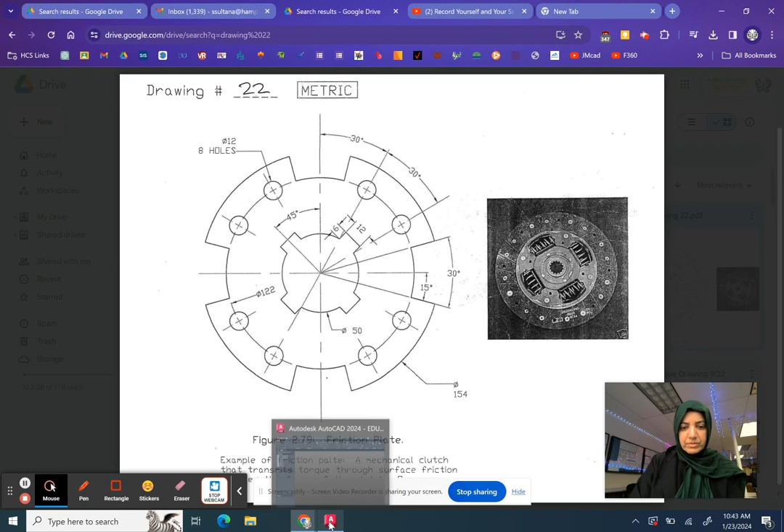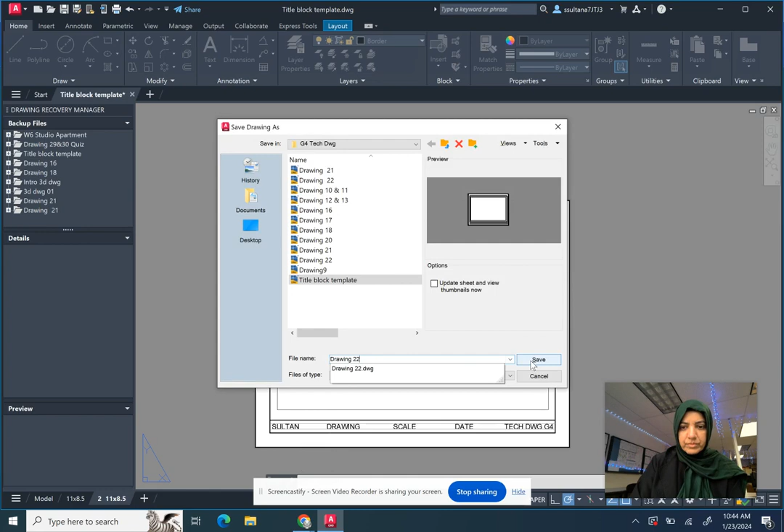So let's go to AutoCAD and open your drawing template that has layers in it. Title block layers, and then save as drawing 22. Click on model space and start drawing.

We're going to start with the center layer, using the line tool, and the start point can be in the first quadrant. Based on the size of the drawing, I'm going to decide 200 comma 200 as the starting point, then go right from there and make it 200 units long.

Now I want to have a vertical line that goes through it, starting at 300 comma 100, and then make the height 200 units for the line.

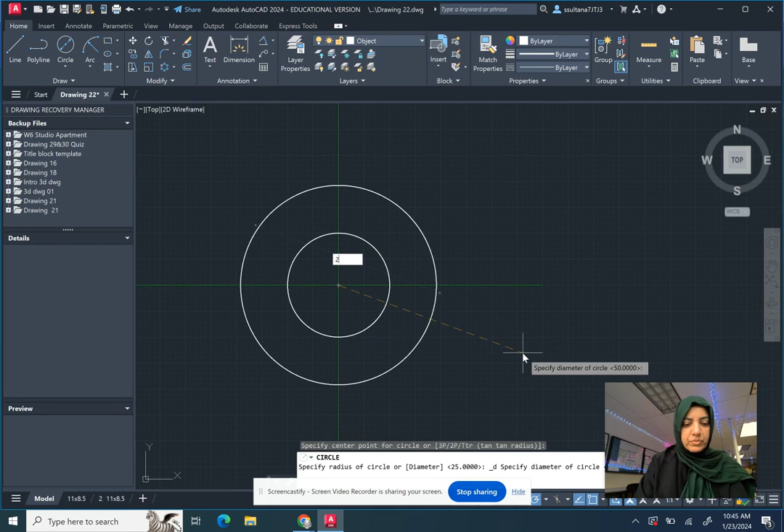Now we can go to the object layer and start our circle. The circle diameter is given, so we're going to select center diameter circle. The first one's diameter is 50. The second circle's diameter is 122, and the outermost circle's diameter is 154.

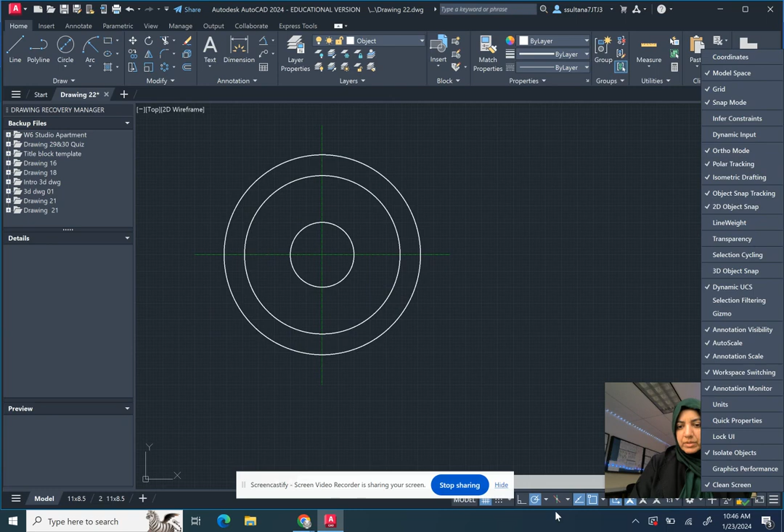Then we are going to use polar tracking, which I have on. If you don't, click on the three lines in the lower right corner and you will see polar tracking there. If I uncheck it, it disappears; I check it, and it appears again. You need to click on it when it's highlighted in blue.

That means it's activated. Click on the arrow next to it and select 15, 30, 45 angles, then click on the line and start from the center of the circle and go, and you will see it snaps on 15.

I'm going to match properties with the center layer and go back to the center layer to draw these reference lines. Click on line again, start from the center, and this time it will snap on 30 - that's where we want. Then we also want one at 60 - it snaps on 60. And then the last one at 75.

Going back to the object layer, you're going to draw straight lines overlapping on these lines here. This circle, we're going to put that in the center layer.

And then we are going to draw small circles, these small circles that have diameter 12. Those are on the intersection where the 30 and 60 degree lines are.

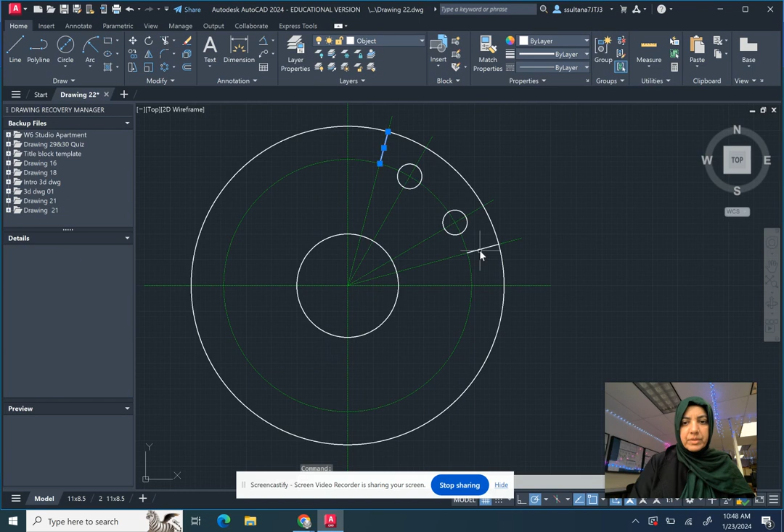Okay, now we are going to trim. Select these two short lines and trim the outer circle beyond those two lines.

And then use the polar array command to polar array these elements: two straight lines, one arc, and two circles. Right click, click in the center, and then change the items to 4. Enter.

Now we do want this arc to be on the object layer, this part of it. And we can trim that to avoid overlapping.

And then draw an arc that is start and radius. So if you click on the start, you have to start from the right side, then go to the left, and then click on the center of the circle to give that radius, which is 61, half of 122.

So you can repeat that, or you can polar array it. Let's polar array it, click the center, and then change the number to 4.

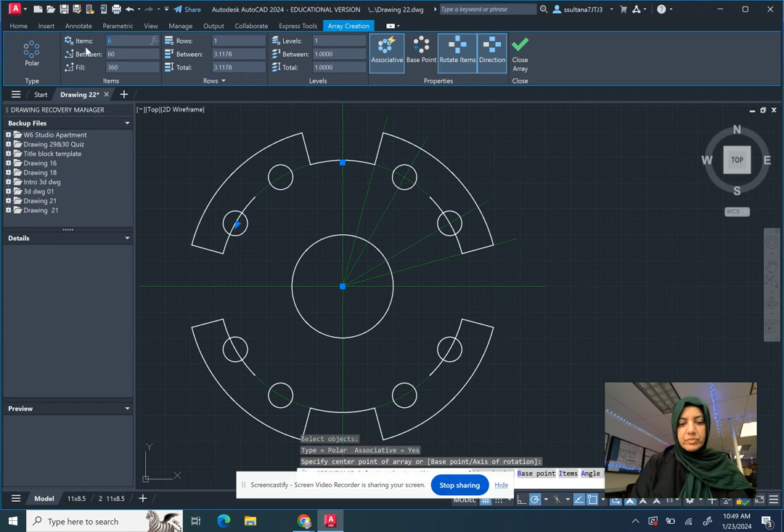The drawing is almost complete. There is a part in the center that you need to add, and that is a 6 by 12, and it's polar arrayed 4 times, landing on the 45-degree angle. So the 45-degree angle is right in the center.

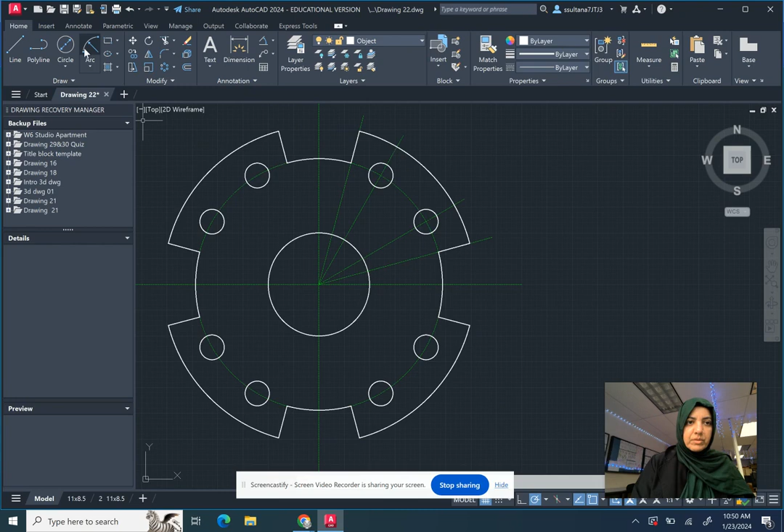So what we can do is draw a polyline, and we can draw it anywhere, making it 6 units, 12 units, and then 6.

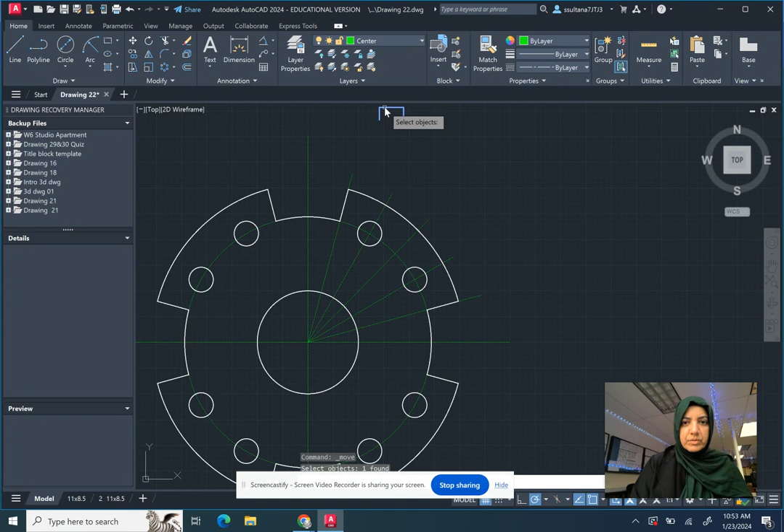And now move that. I'm going to draw a line in the center layer at a 45-degree angle. And we are going to move this, grab it by the midpoint, and place it at the line that is at the 45-degree angle. Then use the rotate command.

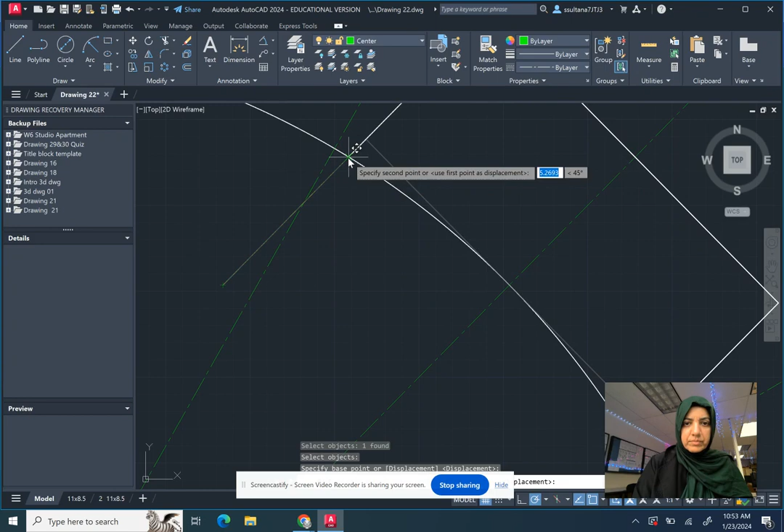Then rotate -45. Now move it: click on it, click at the endpoint, and click at the intersection. Use polar array, click on it, center of the circle, change the number of items to 4, enter.

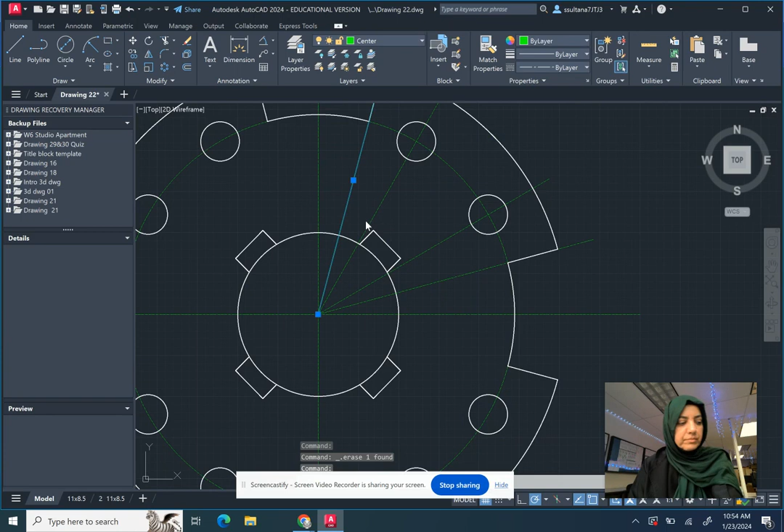At this point, we can delete the extra center lines. And then trim these pieces of circle.

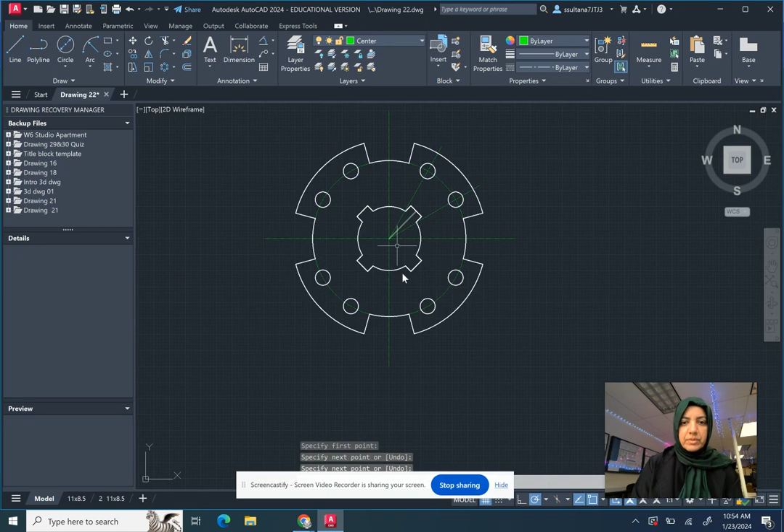There is a reference line we do need for dimension purposes, and that goes from here to the center of this, at the 45-degree angle. So the drawing is complete now.

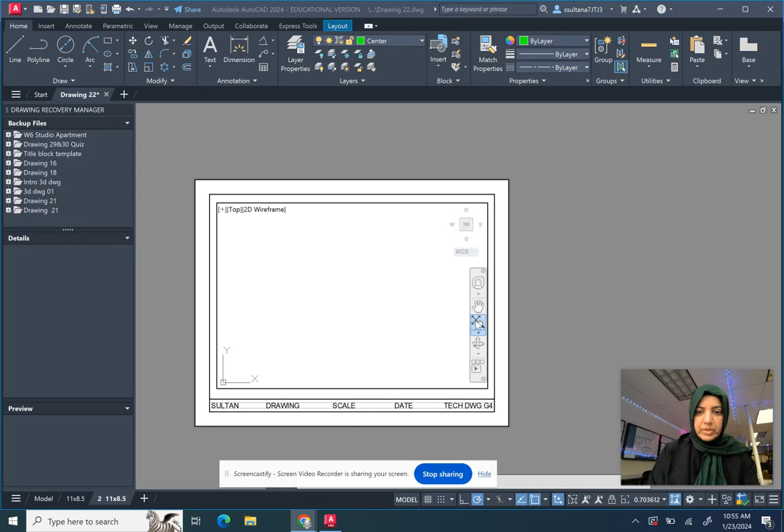So now you're going to go to your layout and double click inside your viewport, make sure it's unlocked, and then you can use zoom extents to bring all your drawing within the viewport. We have to choose an appropriate scale for this.

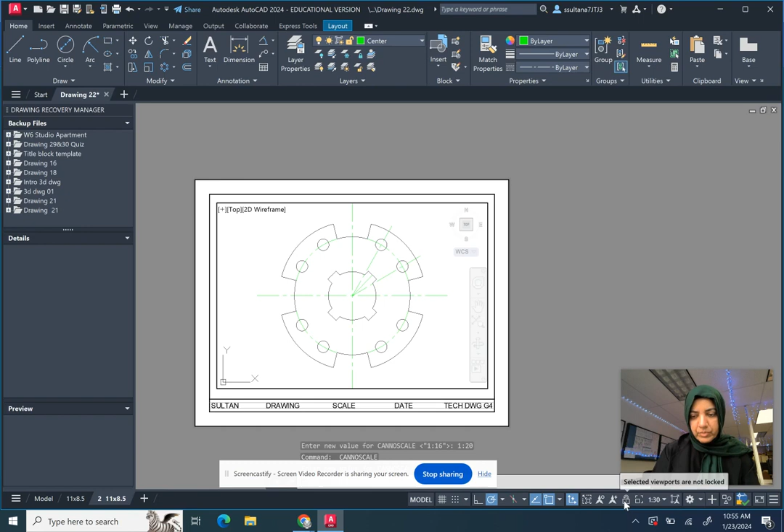We're going to use a 1 to 30 scale, and then we can lock the viewport and double click outside of the viewport, then use your dimension layer to add the dimensions. We are going to use angular dimension to provide dimensions between these two lines.

Provide diameter for the circles.

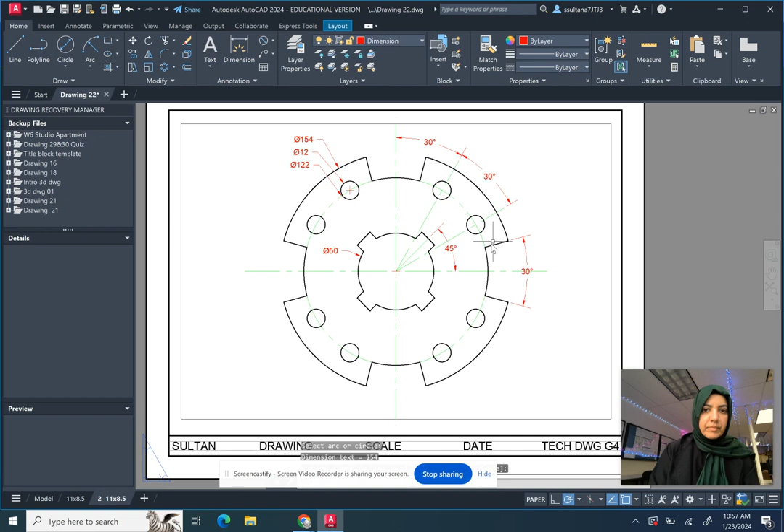And then update your title block. Use backspace to ensure that there is enough room to fit your scale and date. Scale is 1 to 30. And backspace as needed.

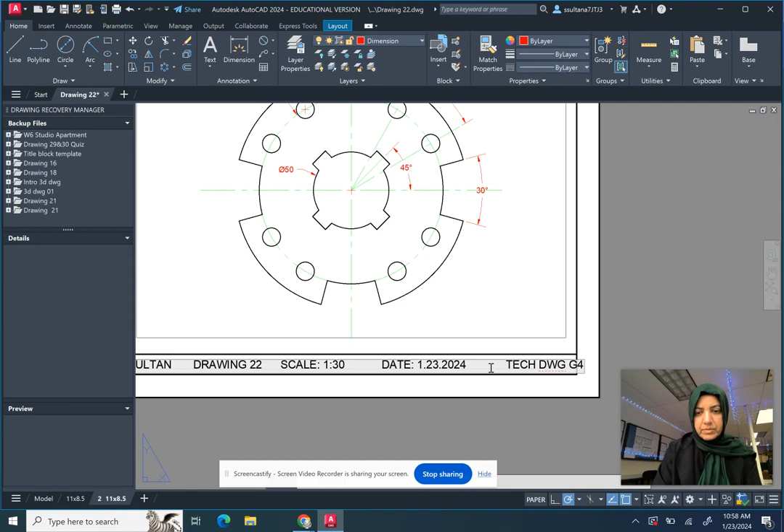And then double check that this is on Defpoints, the viewport, and then you can use export PDF to create a PDF.